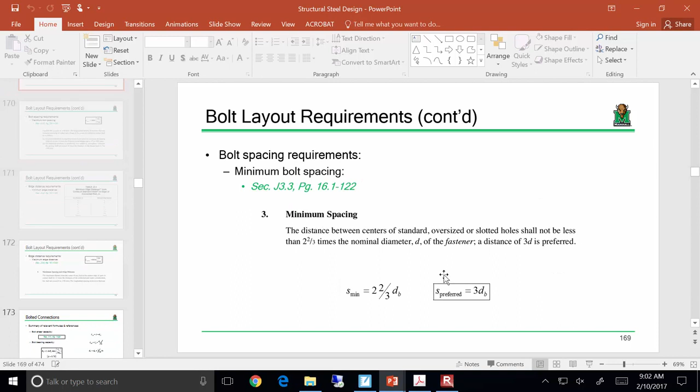I want to go back a little bit to discuss this. Last time we were looking at the two limit states associated with bearing type connections. Remember, really only one of two things can happen if we're talking about a connection that resists loads through pure bearing: either the bolt's going to shear in half, or we're going to fail the plate. Now to fail the plate, we have either tear out or ovalization, and that's where that whole 1.2 LC T Fu comes into play.

The big thing I want to make sure everybody's clear on when we get into our analysis example today is the difference between what I'm calling an edge bolt and what I'm calling an interior bolt.

So for instance, if I've got a plate, let's say I've got this table right here and I've got a bunch of bolts, right here, and I'm yanking on it. The edge bolts are the ones that are along the back of the connection. So if I've got my load right here, and I'm yanking on the plate like so, these are going to be my edge bolts, and then my interior bolts are going to be that next row up. So everybody all right with that?

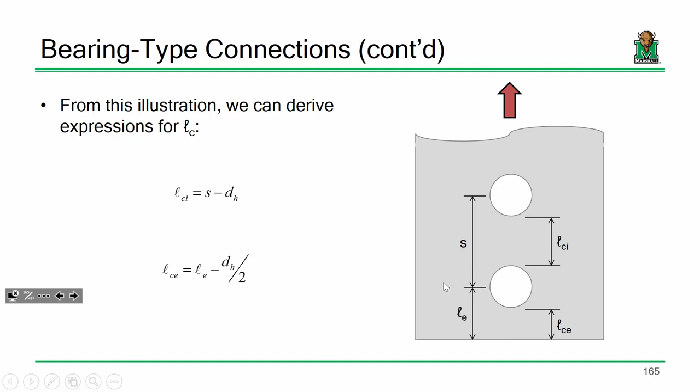If you can identify that, then I think a lot of the math will become basically just grunt work, and it'll be very plug and chug. To calculate your LC distances: LC for edge bolts is just going to be your edge distance minus half a hole diameter. Then for your interior bolts, it's your spacing minus a full hole diameter. Okay, so that's really the only complication in bolt bearing computations.

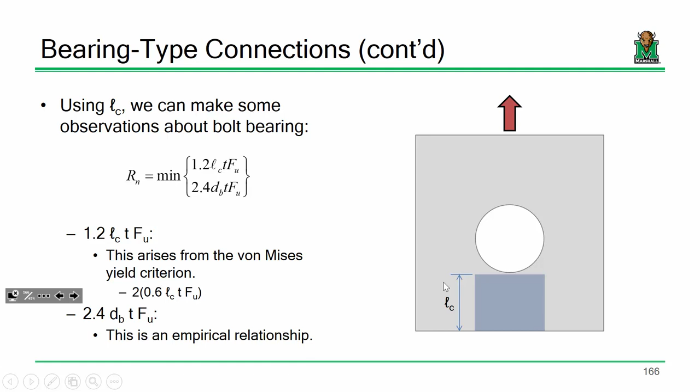Your 1.2 LC T Fu and your 2.4 D T Fu - the LC is the only one that I think is going to trip you up. If you got that down pat, then everything else should run like clockwork. Remember, the upper expression is intended to ensure that the bolt or the plate around the bolt doesn't tear out, and the lower expression is trying to prevent bolt hole ovalization, just the hole literally stretching out and getting too long on you. Everybody okay with that? Okay.

And again, one final point. We talked about this last time, but again, our hole diameters, when we look at bolt bearing capacity, are computed by taking the bolt diameter and adding a 1/16 of an inch, not an 1/8 of an inch. And I told you that would make you angry because we've been using 1/8 of an inch this whole semester. But what we're looking at right now is not how much of that material contributes to the capacity of the member as a whole - we are literally looking at the physical capacity of the plate right there at the bolt. So we're using the physical dimensions, not that extra 1/16 of an inch. So it's the bolt diameter plus 1/16. Everybody all right with that?

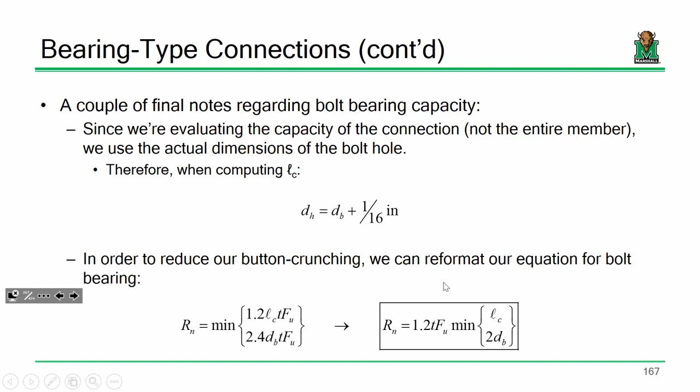So today, before we get into our full-blown analysis example, I want to talk about how a connection should be laid out. I think design of a bolted connection and picking the number of bolts is pretty straightforward conceptually. If you've got 100 kips on a connection and each bolt can hold 20 kips, divide and you need 5 bolts. That's basically it. But that's not enough.

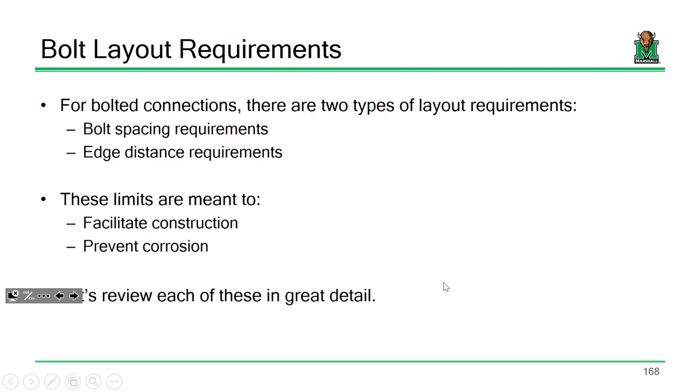You have to actually lay out the bolts. You have to say here's where bolt A goes, here's where bolt B goes, etc. So what we need to discuss are the limits associated with how bolts can be spaced out, not only from each other, but from the edge of the plate, because that's going to matter when we start to lay out our connections. Let's take each of these one at a time.

If you want to follow along, I'm going off of Chapter J in the manual. We've already looked at some stuff in Chapter J before, because this is what we used when looking at threaded rods and threads excluded versus threads included, looking at those shear stresses. I don't have tabs for these particular sections because I'll be honest, I'm going to be referring to a bunch of different pages within Chapter J. So my advice would be, what I have is just a single tab placed at the beginning of J.3.

So I'm on 16.1-118. I want everybody to make sure they're able to find that. I just have a tab placed here because I'm going to be going back and forth from page to page in the manual. This one's going to be on 16.1-122, and then I'm going to have one on 120 and 119. I think it's easier just to have a general tab in this area. Everybody with me so far?

Okay, so the first one I want to talk about is minimum bolt spacing. If you go to 122, you'll find the section right here where it says item number 3, minimum spacing. It says the distance between centers of standard, oversized, or slotted holes shall not be less than 2 2/3 times the nominal diameter of the fastener, and a distance of 3 times the diameter is preferred.

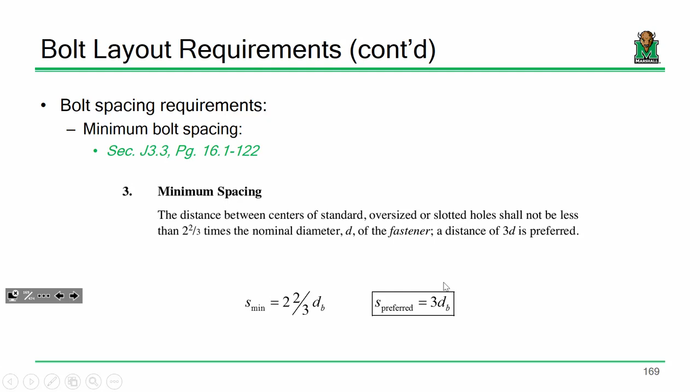You have to keep in mind, you have to be able to construct this connection. You have to be able to get a wrench around those bolts. So the bolts have to at least be some distance apart just to be able to put the thing together. We have to have some minimum limit on our spacing to ensure we're able to facilitate construction. A lot of these limits we're going to be assessing try to meet one of two points, and one of them is facilitating construction. That's what this one's for, to make sure you can actually connect the beam to the column or the column to the brace, etc. Everybody good? So now that's one side of the coin.

Here's the other side. We also have limits on maximum bolt spacing. Now this one is a little trickier to understand, but everybody follow along with me. We don't want the bolts to get too close together, because if they get too close together, they're going to start clanking around on each other when you try and connect the member.

You're going to have a tough time getting a wrench around it. That's going to be a problem. Now what happens if they get too far apart?

Well, let's go back to basics. What are you trying to do with the connection? You're trying to take plate A and plate B and connect it together, sandwich them together. So what happens if those bolts get too far apart is those plates don't really want to sandwich together, and you might have a little bit of a gap in between those plates. What do you think can get into that gap right there?

Water, right? And if water gets into that gap, what's going to happen? You got water in contact with metal, and what does metal like to do when it's in contact with water? It likes to rust. So our two main reasons for a lot of these connection layout requirements are either A, to facilitate construction, to make the connection easy to put together, or we're trying to prevent corrosion, okay?

So I want everybody to go to this, so this should be right around the same region if everybody's with me. We're on 16.1-124, and you should see these limits here for maximum bolt spacing requirements. So let me sort of go along on this with you. I'm on the bottom right here under this table, what is it, J35M? Does everybody see that? Okay, good.

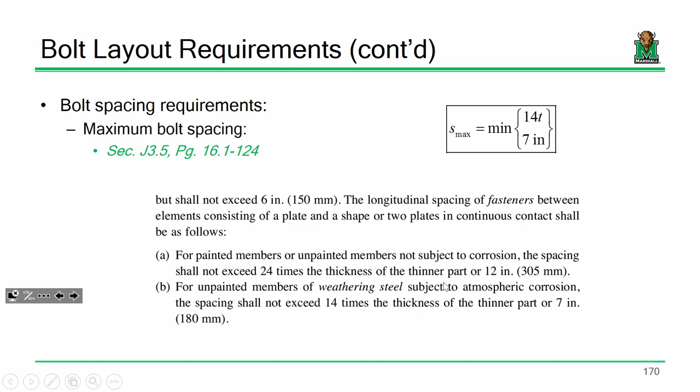Now that's limits on how far apart bolts can be spaced from each other. We also have to talk about edge distance requirements - in other words, how far apart bolts can be from the edge of a given plate. So this is the only one that's a lookup. If you go to table J3.4, it's on 16.1-123, so it's literally back a page. This is what I was talking about when I was saying I don't place a tab on every single page in this chapter because I'm literally going back and forth. As long as you've got a single reference, I think you're going to be pretty good.

So going to minimum edge distance, this is the only one that's a lookup. All the others you can compute a minimum spacing or maximum spacing.

Did it? Oh, no. Well, how many mistakes was it? Am I allowed 7 mistakes? Is that what it is? I'm only at 1. I think I'm doing pretty good, right? But then I'm the one who keeps track of the mistakes. Yeah, and what was it last semester? I kept having 4, right? Is that what it was? Yeah, you all let me know that. I remember that. Then you also made fun of my handwriting, so I haven't forgotten that.

Oh. I'm going to remember that.

All right, barring my mistakes, is everybody able to find this one? On what was it? Maximum spacing. Okay, is everybody able to find this one?

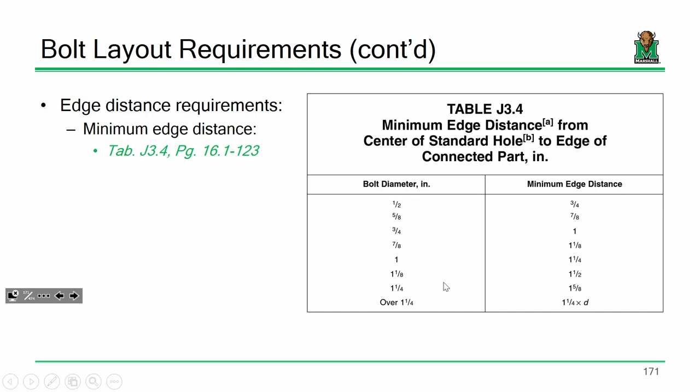Okay, this is the only one that's a lookup. I would like it if there was a formula, and there is a general pattern to it, but by and large this is one you've got to look up. This one comes from the fabricators, really, because there are multiple different means to fabricate a hole in a plate. You can drill it, you can sub-punch it, you can use a CNC machine or something like that. Depending on the different fabrication techniques, fabricators get nervous when the holes get too close to the edge of the plate, because then they're worried about the plate distorting or not meeting the requirements of the drawing. So really the fabricator's like, in order for us to ensure that the connection meets the requirements set forth in the spec, these are our minimum edge distance requirements. So these just come straight from the fabricator. So those are the only ones that are a lookup.

The edge distance requirements on the maximum end, the ones to prevent corrosion, those are simple. Let's just keep it simple: either 12 times the thickness or 6 inches.

And in terms of thickness, on all of these you're always going off of the minimum thickness. So if you've got a 1/2-inch plate connected to a 3/4-inch plate, when you're checking minimum and maximum bolt spacing or edge distance requirements, you're going off of the thinner plate. So in that instance, we're talking about the 1/2 inch. Everybody okay with that? Any questions so far?

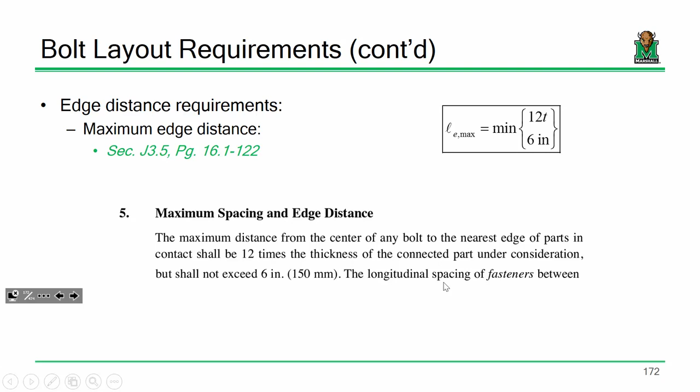So if you want this next slide, this is probably a good place to put a big star or exclamation point in your notes, because this is a nice summary of all the calcs that we're doing.

So last time we talked about bolt shear capacity and bolt bearing capacity. And if you recall, bolt shear capacity is a lookup. We don't have to do all the calculations - we go off of table 7.1. And that one should be tabbed in your manual if it isn't already.

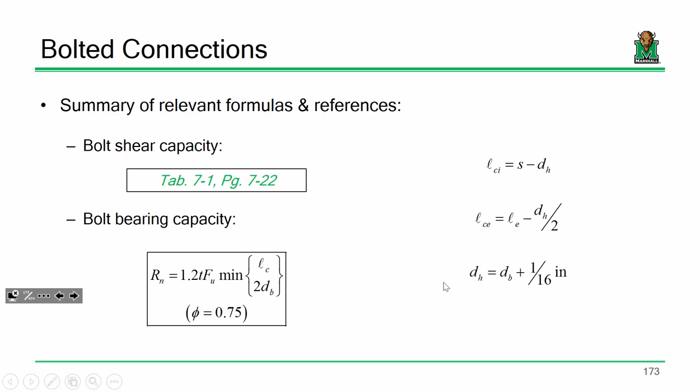For bolt bearing capacity, that's one we sort of have to grunt out: 1.2 T times the ultimate tensile stress times the minimum of either our clear distance or 2 bolt diameters. Remember, don't forget phi - this is a very common mistake, forgetting that once you've done all this you have to adjust it by your safety factor. The only formulas you need that aren't explicitly stated here are your clear distance for interior bolts, edge bolts, as well as your hole diameter - remember, 1/16 of an inch.

And lastly, your relevant formulas for bolt spacing requirements. What I'm going to assume for most connections in this course is everything's unpainted - the worst case scenario, which for most commercial steel structures is the case. Most of your connections in a building like this - you go behind the wall right here and you've got a column and a beam framing into that - that steel, more often than not, was unpainted. So your maximum limit, I'll go off of 14T or 7 inches. But when we're in design mode, we're usually designing for minimum spacings, not maximums, because we want our connection region to be as small as possible. Smaller connections mean smaller connection plates, which means less steel, which means less hit on the wallet of the client. Make sense? Everybody okay with that?

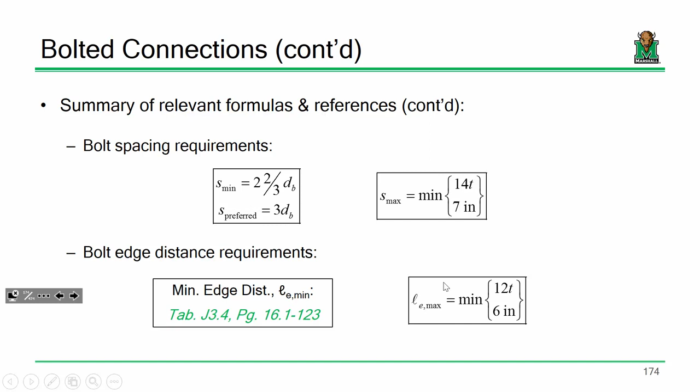All right, so I want to look at the following examples. What I've got here is probably something akin to a splice connection. So I've got member A and member B, and I want to splice them together. So I might put a plate in back and a plate in front, sandwich them in, and bolt them together. Everybody okay with that?

I have a 3/4 inch plate, I'll call it the center or main plate, and it's being connected to 1/2 inch thick plates on the top and bottom, with bolts going through. So help me out - are we in single shear or double shear? Double shear, there we go. All right, so we've got a double shear connection with 6 bolts. You're really going to want to pay attention to your spacings, because one of my edge distances is going to be 2 inches, but another is going to be 2.5. So this just becomes a bookkeeping issue, making sure you're clear on that. Okay, so we've got A36 steel.

We have 1 inch diameter Group A bolts, Group A X bolts, so the threads are excluded from the shear plane. We're going to determine the capacity of this section and also determine if it meets layout requirements.

Before we start checking this out, let's be clear, this is still a tension member. We're still taking a piece of steel and yanking on it, so gross section yielding, net section fracture, block shear, all that still matters. We're just not going to worry about it in this example because we've already done that, and you've got homework on it.

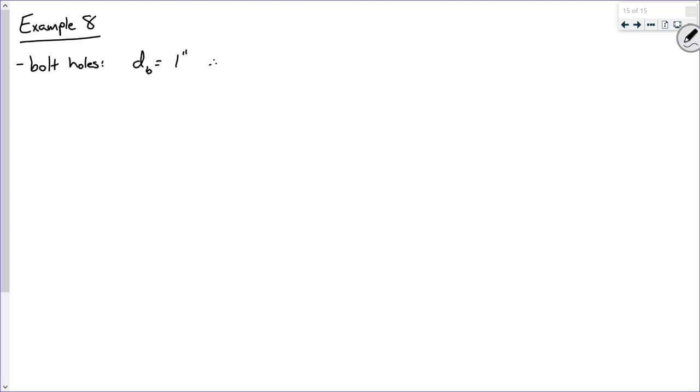Let's start with the bolt holes. What's the diameter of the bolt? 1 inch. So what does that mean? 1 1/16 - there we go. So the hole diameter is 1 1/16 of an inch.

Or if you want a decimal value, what's that going to be? We're going to work on this one together. 1.0625? There we go.

I'm going to write the whole thing out because with bolted connections, I want the calculations for a single bolt to be somewhat precise, because we're going to take that and multiply it by the number of bolts. Some of these connections might have 30 or 40 bolts, so I'm going to try to be precise.

Okay, that's the bolt holes. Now let's look at the steel. We've got A36 steel. If we've got A36 steel, what is our tensile stress? Going to table 2-4, 58. Remember, when you've got the range, go off the minimum. So we'll say FU is 58 KSI.

And I'm going to say, all right, we've got table 2-4. Sound good? That's just me referencing where I'm getting that from the manual.

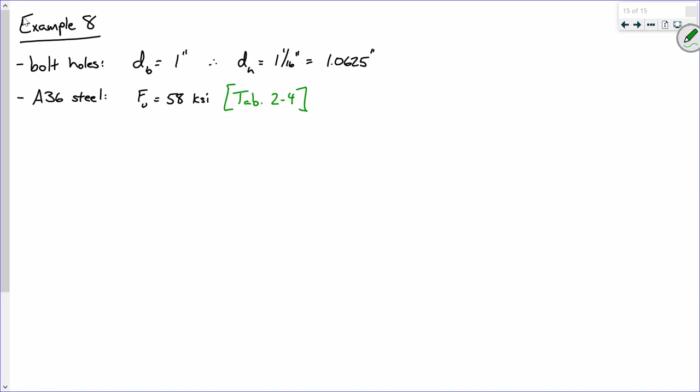Now we've got two different limit states that we're going to assess. We're going to look at bolt shear and bolt bearing. So let's do bolt shear first. Let me go ahead and write that out - bolt shear.

Remember, we've got our handy-dandy A in the middle of the manual, so we're going to 7-1. Remember this one, available shear strength of bolts. Now, which numbers are we looking at? Green numbers or blue numbers? Blue numbers - there we go. LRFD. So tell me what I need to know in order to properly look up values for this connection.

What type of bolts do we have? Group A, Group B? Group A. And that's included or excluded. Now, we said the diameter of the bolt was 1 inch. And you all answered this earlier - which shear were we in? There we go.

Now, based off of these parameters, I want you to tell me the following: what is the shear capacity of a single bolt? 80.1 - does everybody see that? So 80.1, and what I usually do is say that's phi RN, but I use a little r to say that's per bolt. So phi rn is 80.1 kips per bolt. On magnitude, that's 80,000 pounds to fail and shear a single bolt.

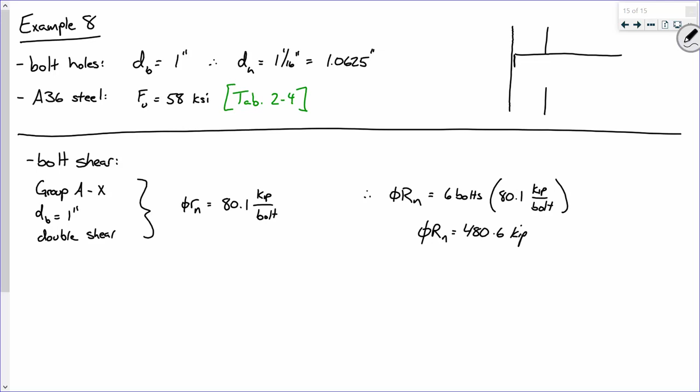Now I will say this, for connections like this, we're sort of putting the blinders on and just saying we're going to assume that they're all equally loaded. But if you have what's called an eccentrically loaded connection, let's say you've got a column, something like that, with some element framing into it, and you have a number of bolts right here. But instead of yanking on it in pure shear, if you're bending it, then it's a whole different story.

Because in this instance, think sigma equals My over I, this bolt is going to be experiencing a different stress than this one. We can explicitly go through and compute that, and we do that later on when we start tackling some more advanced topics. But if you've got a connection that's just being yanked on, yeah, the bolts are probably experiencing a little bit of different stress here and there, but that math is handled a little bit in the background. For what we're doing, we can just say 80 kips per bolt times 6 is good enough.

But that's a great point to bring up. Anybody else? This is good stuff. Anybody else? All right, please, if you got anything, this is good stuff.

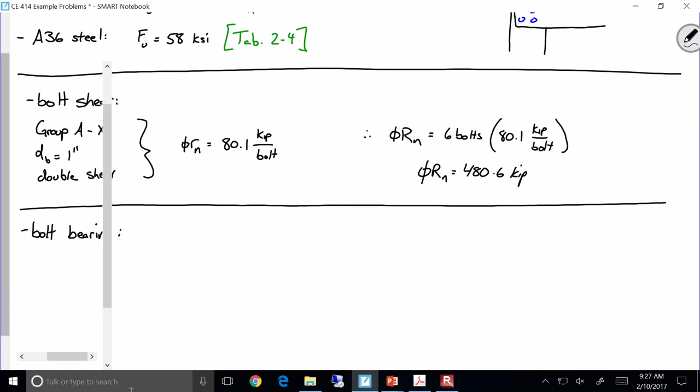All right, so this is bolt shear. Okay, let's look at bolt bearing. Now, you're going to be mad at me, but this is just how we have to do this. Unfortunately, bolt bearing calcs can be a little bit repetitive, and I'll explain why. Let me go back to the PowerPoint to bring up the image. Here's the image associated with our connection. I want to make two points.

When we do bolt bearing calcs, we always have to look at at least two different situations. What are you doing in a connection? You're taking member A and connecting it to member B. When we're doing bolt bearing calculations, we are evaluating not the bolts, we are evaluating the members. So at the very least, theoretically, we have to do at least two bolt bearing checks: one for plates transferring load to the left, and another for plates transferring load to the right. Make sense? Now, sometimes we can be a little crafty and use common sense.

For instance, if we just had a single lap connection, plate A connected to plate B, and they both had the same dimensions, the same steel grade, and so on, well, we don't really technically need to do two checks. We can just do one because they're both the same, right? That's not the case here, okay.

If we look at the plates transferring load to the right, we've got 3/4 inch of steel. But the plates transferring load to the left, we have 1 inch, because we got a 1/2 inch here and a 1/2 inch here. So we have a greater thickness of steel transmitting load in this direction. But if that was the only variable, maybe I could say we just need to check this one. Because with less steel, this is going to be the weaker plate, this is going to be the one that governs.

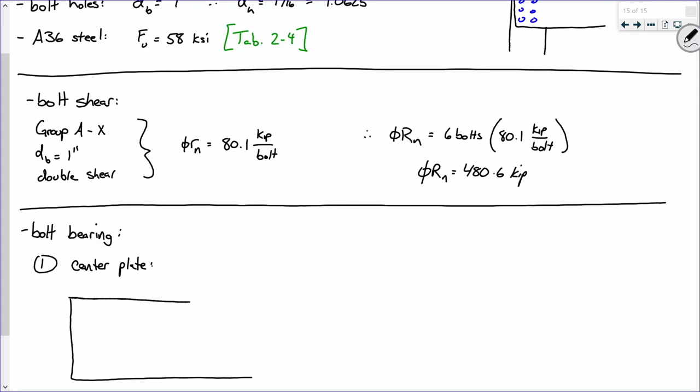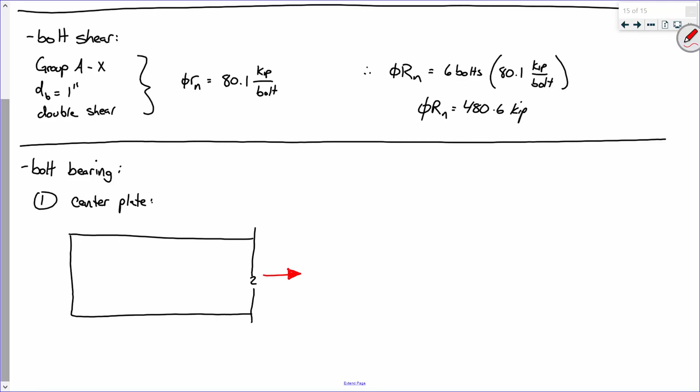We've got a plate going like that. There's my break line, and then I'm yanking on the plate, something like this. And I've got 1, 2, 3, 4, 5, 6. All right, so this is just looking at that center plate.

So these center-to-center spacings of the bolt, these are the what? The 3 inches? Okay, all right, 3 inches. So that means this one's 3 inches, this one's 3 inches. Sound good? And our edge distance, the one on this back end, that's the what? That one's 2.5, right? Again, looking at the center plate, it's the 2.5. For the cover plates, it's the 2 inches. Everybody okay with that? All right, so this is, I'll just say 2.5 inches, like that. Sound good?

So let's start writing this out. We have an S value of 3 inches. We have an edge distance of, what is that, 2.5 inches? And we have a thickness of 3/4. So far so good?

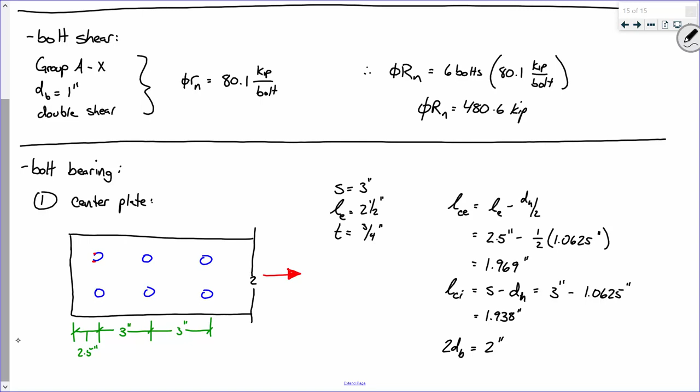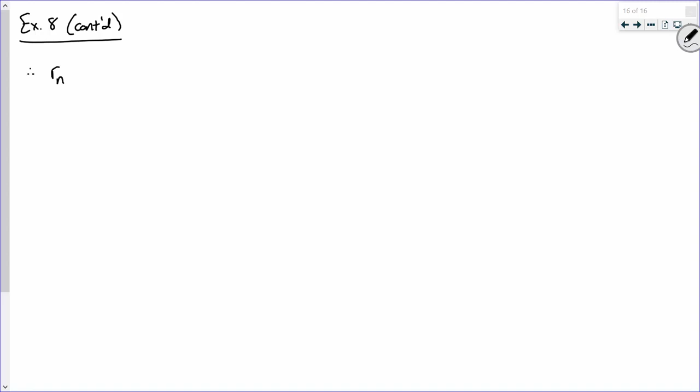All right, okay. So here's how we'll do this. I'm going to calculate a nominal capacity of an edge bolt, and I'm going to say it's 1.2 T FU times the minimum of LCE or 2 bolt diameters. But I don't need to do that evaluation at the end because I've already done that, it's going to be LCE. So let's plug and chug.

You tell me, so it's 1.2 times, now what's the thickness? 3/4. Again, we're looking at the center plate, so 3/4. All right, FU, what was that? We looked that up way back, 58.

And what do we do here? No. Between LCE and 2 bolt diameters, yeah. So, well, no, okay, that's a good question. So I'm looking at an edge bolt now. I'm going to take this and do it again and have an RNI, a capacity for the interior bolt.

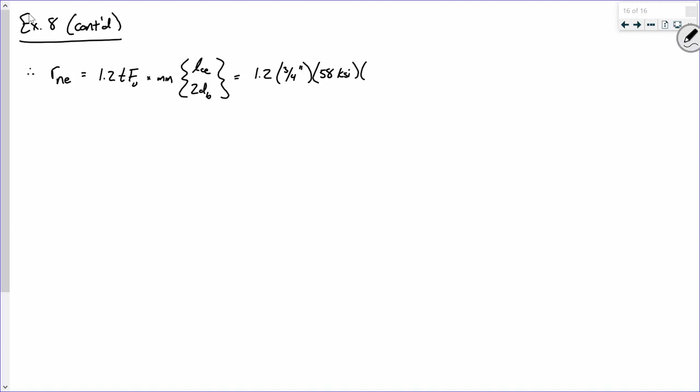So now it's just the edge bolt and a 2 bolt diameter. So what was this one? That's a good question. I'm doing that, okay, that's sort of my way of recognizing that I'm only looking at a single bolt and not the entire connection. Remember what I did back here?

See this right there, how I had phi RN, but I had a little r to say that this was 80 kips per bolt, and then this was the capacity for the entire connection. It's just sort of the same notation. Remember, I'm just looking at the capacity of one edge bolt, okay? So that's why I use a little r. Everybody okay with that? That's just sort of my way of keeping track of what's going on.

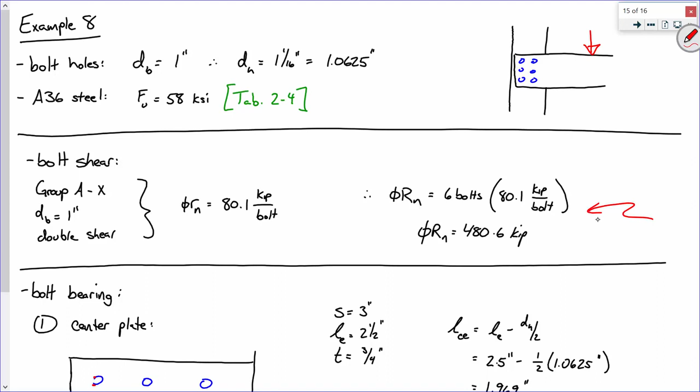All right, so what was my LCE value? I don't remember if I got that. There we go, 1.969. All right, so whoop, I can do better than that. You tell me, what do we get here? 102.78. Do I got a second on that? All right.

Now, two points I want to make. Again, that is the capacity for just a single bolt, but one thing we have not done yet is apply phi, our resistance factor. Don't forget to do that at the very end. All right, so that's Rn for an edge bolt.

Rn for an interior bolt is 1.2 TFU times the minimum of LCI, or 2 bolt diameter. So this is where your question, Mr. Hampton, comes in. That's where the interior bolt comes in.

All right, so same story. 1.2 times 3/4 of an inch times 58 KSI times, what's our value going to be here? 1.938. All right, so what do we got? 101.16. So I got a second on that? All right.

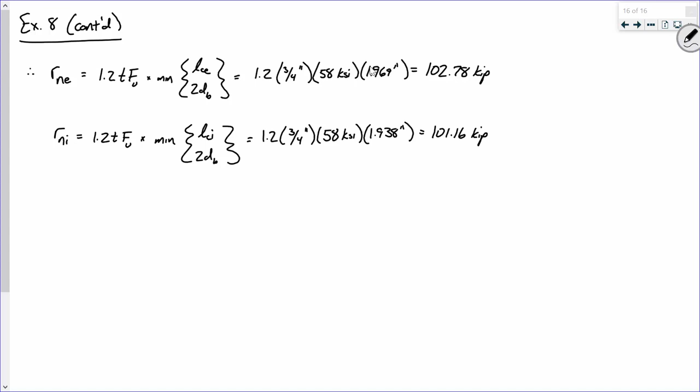All right, now I'm going to need your help. So this is the capacity for an edge bolt, and here's the capacity for an interior bolt. So you tell me, what do I need to do to get the capacity of the whole connection? Well, how many interior bolts are there? Four. And how many edge bolts? Two. So two times the capacity for the edge bolt, four times the capacity for the interior bolt. Add those up. That'll give me the capacity for the whole connection. So here's my big Rn.

So Rn is going to be 2 RNE plus 4 RNI. So 2 times 102.78, plus 4 times 101.16. What do we got? So 610. We'll cut it down a little bit now, we'll say 610.2. Now, do I have a second on that?

All right. What did I forget? There you go. Now, what is phi? 0.75. There we go. So therefore, phi Rn is 0.75 times 610.2. So we'll just put that over here. So phi Rn comes out to be what? 457.7, is that what you said? All right, do I have a second on that? There we go.

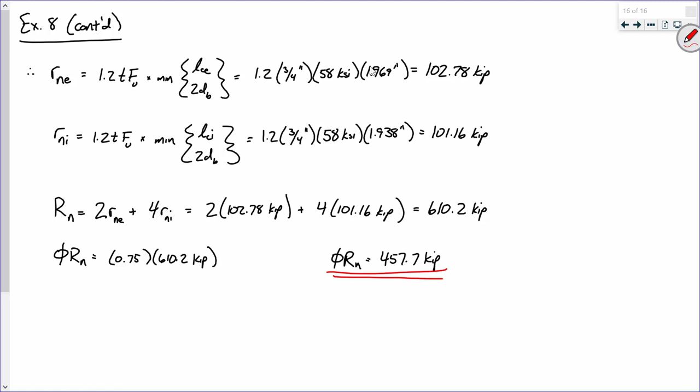So this is what governs the capacity of this section so far, okay? We're technically not done because there's a whole other set of plates we got to assess, okay? Now here's how I'm going to handle that, all right? So I'm going to make you all do a little bit of work. Oh, no. So we're going to look at case 2, the cover plates.

Now here's the easiest way to handle this. Number one, all right, when we did the main plate, we started listing some parameters like what's the bolt spacing, what's the thickness, what's all that. So let's just keep that same pattern. So for cover plates, what's the bolt spacing? Three inches, plain and simple.

All right, now, here's the kicker. What is the edge distance? This is one point I want to make right now. What's the edge distance? Two inches. For the cover plates, it's two inches. Okay, now, that's the first point I want to make.

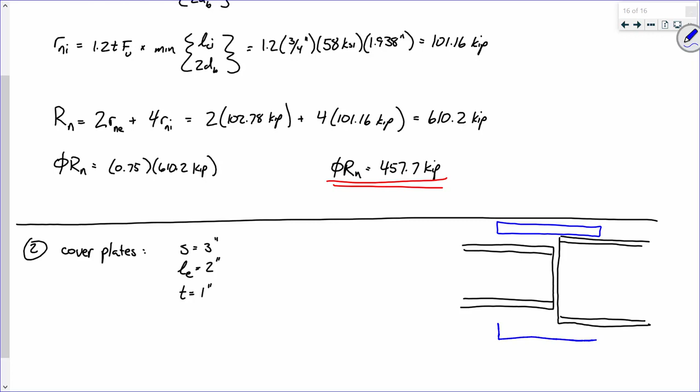I might say, let's put a plate up top and a plate on the bottom. But there's a problem: there's a little gap. So a lot of times what fabricators will do is insert what's called a fill plate to fill up that little gap, maybe something like 1/8 of an inch. It's not a structural plate and it's not resisting any load. It's just there to get an even surface to splice member A and member B together.

So that can happen, but with different size splice plates, more often than not, no, you're not going to do that. Does that answer your question? Did you have a question?

Well, what I'm getting at is, think about this: when I yank on this, think about how the load's being transferred. I've got a load on this member, that load is going to these bolts, so it's going into this plate, and then the bolts are ultimately going down here. I mean, yeah, you can develop some friction forces here and there.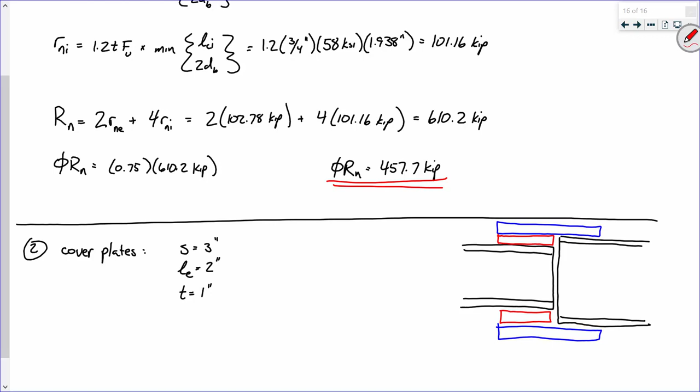We'll come back to this on Monday. I want to revisit this connection and see which one's going to govern. One thing I will say is after we get into that, we're going to get into design. And I'm just going to say, design is pretty simple. What I said before, that's basically it in a nutshell.

You literally take the factored load, 1.2 dead plus 1.6 live, you got the load. You take the capacity of a bolt. So if I have 100 kips on that connection and each bolt can hold up 10 kips, how many bolts do I need? 10 bolts. Use my bolt spacing requirements to figure out how to lay them out. Check bolt bearing, that's it. There's nothing else to it. If bolt bearing fails, maybe take your bolts and space them out a little further. That's it, there's really nothing else to it for bolted connections.

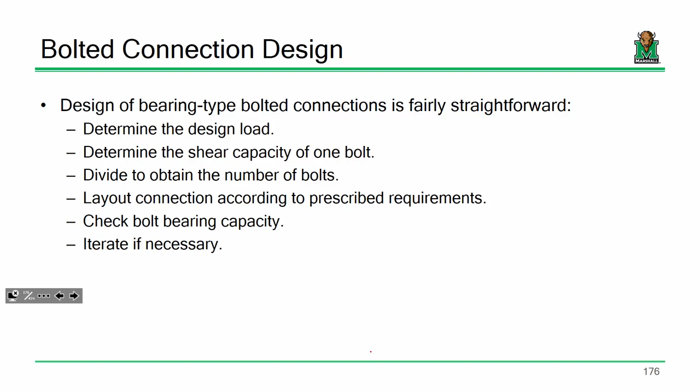We'll have a quick example on that, and then we'll get into our second class of connections, which are slip critical connections. Those are where installation methods, friction, and things like that come into play.